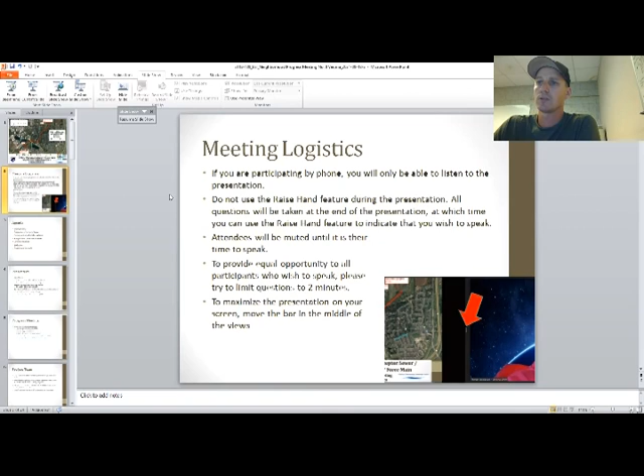Agenda: we'll go through instructions, presenters and team, schedule updates, the Badger Mill Creek restoration updates, communication, websites, and then any questions.

Presenters include myself, Aaron McFarland from the City of Verona. Other individuals who aren't here include Eric Jellin with MMSD, and from Dane County, Sarah Riggleman and Teresa Nelson. The intent of the progress meeting is to provide an update on the upcoming construction schedule and construction-related items, as well as the Badger Mill Creek Restoration Project.

This covers both the Dane County segments and the City of Verona segments. The project team consists of the City of Verona and Madison Metropolitan Sewerage District, Dane County Parks and Land and Water Resource Department, Short Elliott Hendrickson as the designer, Minger Construction as the general contractor with various subcontractors, and City of Verona and district staff performing construction inspection.

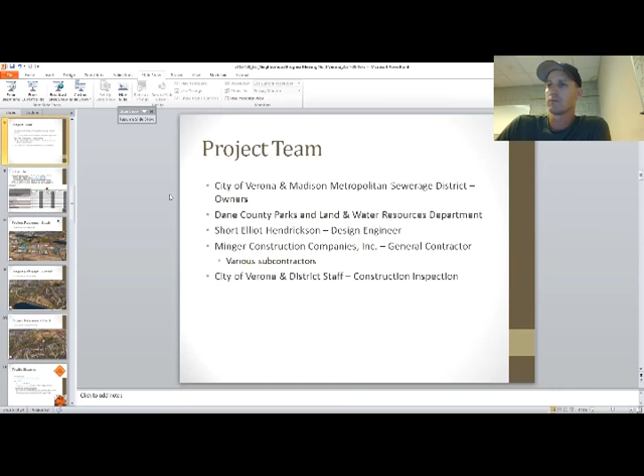So the updated schedule - here is a snapshot of the 3-week look ahead. Right now we are on the 18th, middle of the week. They are continuing on the City of Verona stream bank excavation and boulder placement, and then they'll move on towards the Dane County portion after that's complete. Now I'm going to jump over to the section views.

As shown before - okay, share, all right, so you should be seeing the section views. On the south end of the project, everything's completed, everything's tied in, and existing abandonments are done.

So next week, Minger is planning to perform the City of Verona stream bank restoration in this portion, kind of right up through Fireman's Park, the local A connection as we call it. Following that, in the next couple of weeks, seed restoration will be completed on the banks. Then there are some local tie-ins like up by the Carnes and Fireman's Park and some miscellaneous areas that will be taken care of after that stream bank is completed.

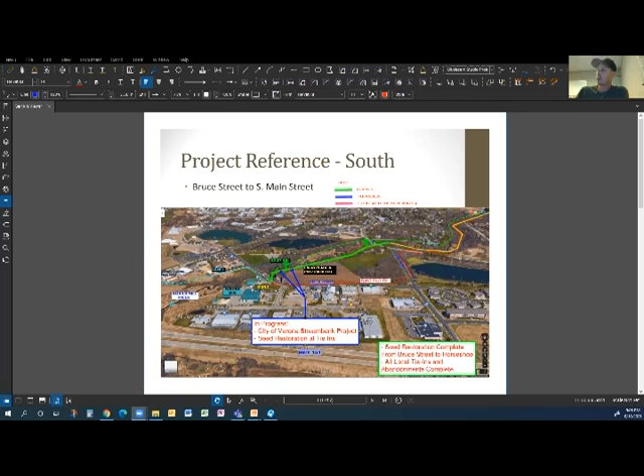Moving to the north or east in the central segment, that's where Minger is currently working on the stream bank City of Verona portions from County M up to Lincoln Street. They're doing some grading, rock deflectors, and boulder clusters. We got a little portion over here, kind of by the horseshoe, that they'll be completing end of this week - most likely we'll be able to get that done this week. Then in the future, after that's complete, they'll do some path grading in this area and then paving the path and final restoration.

There are a few storm sewer items that will be completed, planned in the next 2 to 3 weeks or so, depending on when additional crews are available. Once path grading and paving occur, the Lincoln Street path from Hillcrest to Lincoln Street will need to be closed for a duration to accommodate grading and paving.

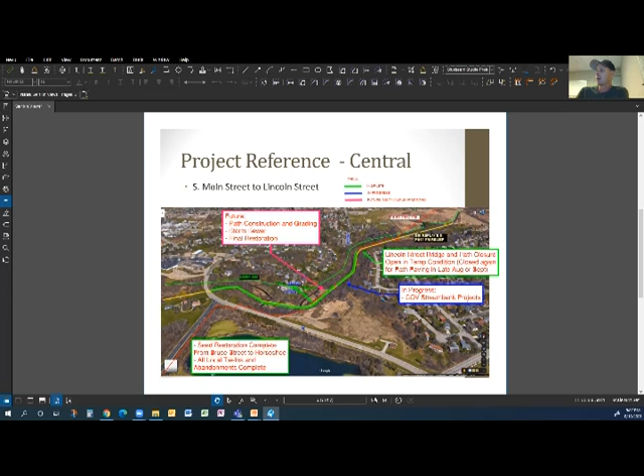Going all the way to the north segment, to the east end of the project, some existing abandonments still need to occur - they're slowly chipping away at those. Once the City of Verona stream bank grading and in-stream items are completed, they'll move towards the Dane County stream bank project. It's anticipated they'll be in the Dane County portion not next week, but the week following.

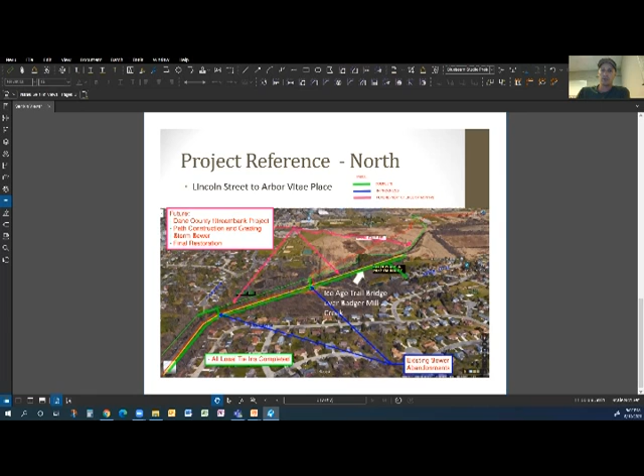So that 3-week look ahead got pushed a little bit. That concludes that, so I'll stop sharing and get back to the presentation. Where it shows Dane County starting middle of next week, that most likely will push a few days and be into the following week.

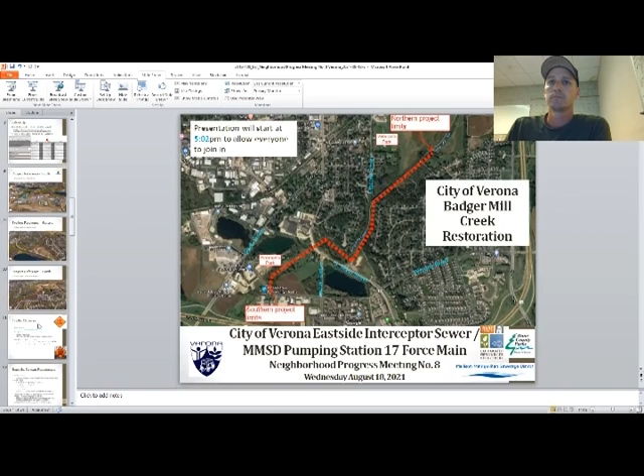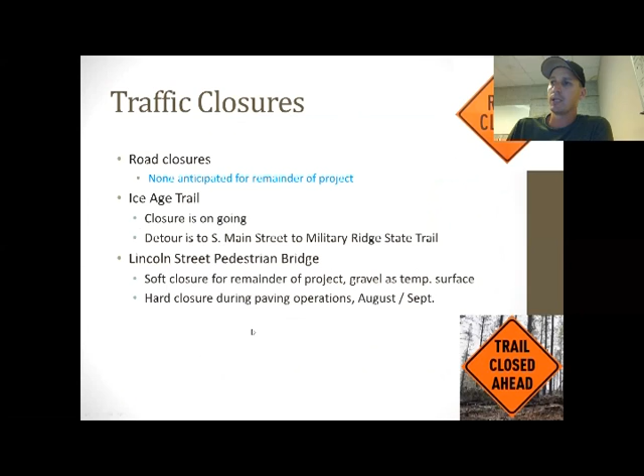Okay, so traffic closures. There's no road closures at this point or for the remainder of the project. The Ice Age Trail closure and detour are still ongoing, and that will continue until the project is completed. The Lincoln Street pedestrian bridge and path will need to be closed again for path grading and paving.

There'll be barricades put up and we'll send out a notice for that. So getting into the stream bank restoration, I'll briefly run through the Dane County portion, and if you have any questions, I can try to answer that, or I'll defer those to Sarah.

Project location, Lincoln Street to Highway PB, Badger Prairie Community Gardens. There's in-stream trout habitat improvements, log deflectors and log sills, root wads and rock deflectors, grading and berm removals for floodplain reconnection. The plan was revised to adjust for quantities of woody material available for construction of the log sills, based on what was taken out when they cleared and grubbed.

More root wads versus log sills will be installed upstream from Lincoln Street Bridge on the north side of the stream. Anticipating construction is now going to be the end of August and then into September.

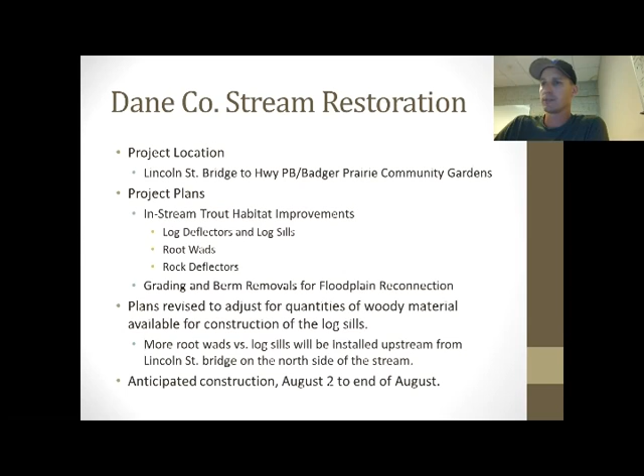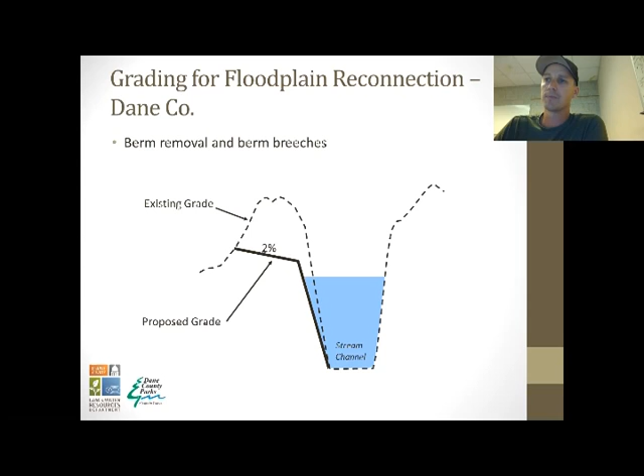So the floodplain reconnection, berm removal - this is a depiction of what's going on with the grading areas. The dashed line is the existing grade, and the darker bold line is kind of the general idea of the proposed grading. They'll slope it back and allow for the floodplain reconnection in areas behind that. There's quite a few areas that have these berms and locations throughout the project.

Some in-stream trout habitats - these are the log deflectors and sills. On the upper left is a plan detail showing key elements and how far they go back, and on the lower right is an actual installation. This is, I believe, on the Sugar River south of Verona.

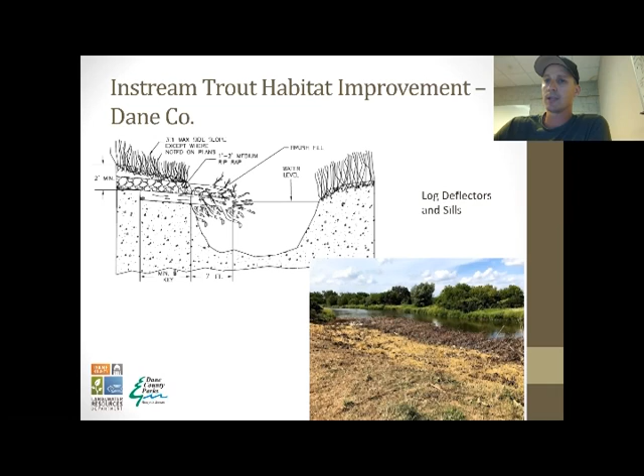So there'll be quite a few of these going in, and the contractors will be working with Dane County as these are going in. Another one are rock deflectors.

We are putting these on the city of Verona portion as well. They're shown here where it's just a bump out of larger boulders or medium riprap embedded back into the bank and below the water. It'll deflect water and create a location for habitat.

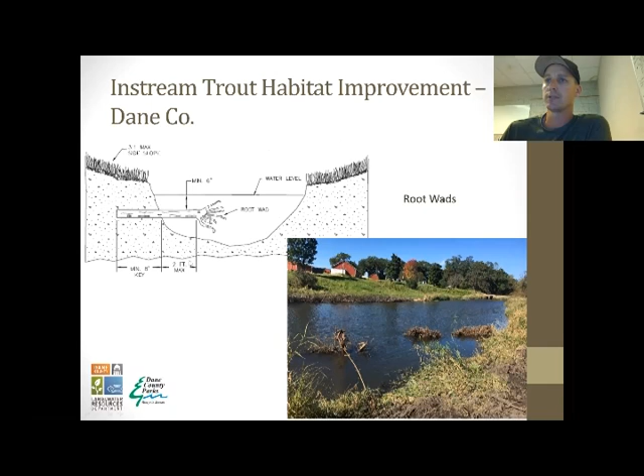Root wads - here's another depiction. They get keyed into the bank, and the actual root area will stick out of the bank a little bit. On site, there's some pretty decent sized root wads, so hopefully everything should work out well with that.

Once construction gets going, on our next progress meeting there'll be some more pictures of our project in here.

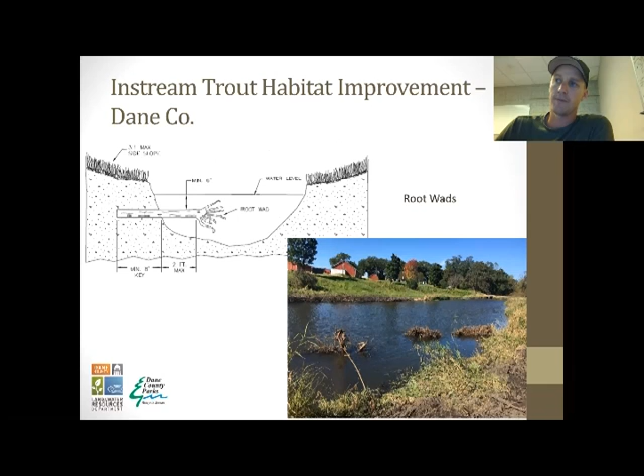All right, to the city portion of the Badger Mill Creek stream restoration. The proposed improvements are stream bank regrading and restoration segments on the east side of the creek, kind of towards where the interceptor sewer was going in. It consists of in-stream rock deflectors, in-stream boulders.

The schedule - everything has been approved and they started construction. It'll most likely be done in the next week and then with restoration of the banks done following that. The final restoration after the path will take place at a later date, but the stuff at the creek and along the banks will be restored within the next couple weeks.

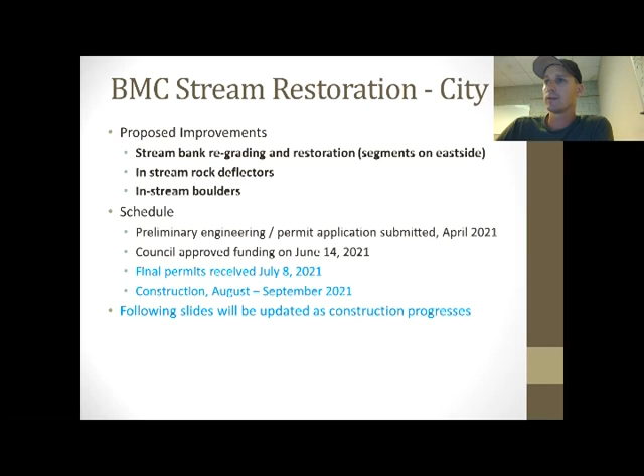So here's a plan view of the locations. Here's down by Bruce Street - that's where they're going to be moving to, anticipated to be there early next week. This portion here, by the Badger Mill Creek Horseshoe, is where they're going to be moving next. That consists of grading, which should take a day or so.

And then they are working along this segment, and they have some grading to do, and they're currently putting the last couple rock deflectors and boulder clusters in. A note here: Friends of Badger Mill Creek were notified via email on April 1st, 2021 of this plan.

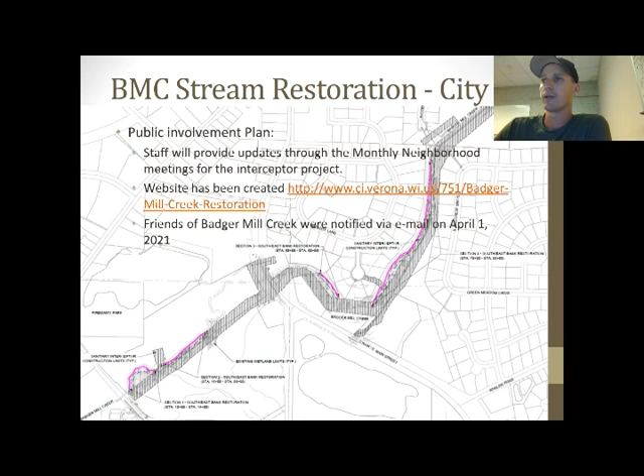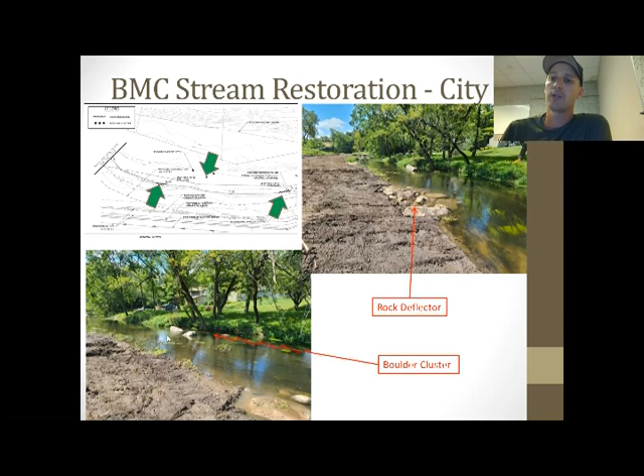And on the bottom left, the three boulder clusters. These were fairly large boulders that got placed in here, but they're shown in this type of spacing. There's different spacing, different configurations at different locations.

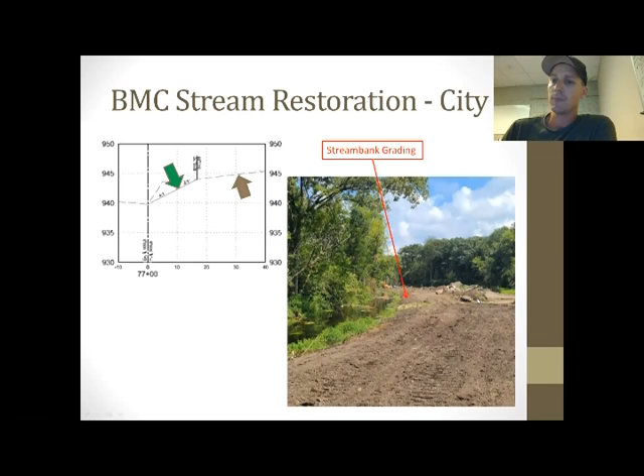All right, communication. The next meeting will be September 15th, 2021 at 5 p.m. These are monthly Zoom meetings, the third Wednesday of the month at 5 p.m., starting January 20th, with the last meeting occurring September 15th. So the next meeting is the planned last meeting, which will include a schedule update on the project and open dialogue for questions.

I see Tim Spencer has a question, I'll allow him to talk. You should be able to go ahead, Tim. Thanks, can you hear me? Yes, I can hear you. Okay, two questions. One, are there plans to put lights along that paved path? I do not believe there are any plans for lights.